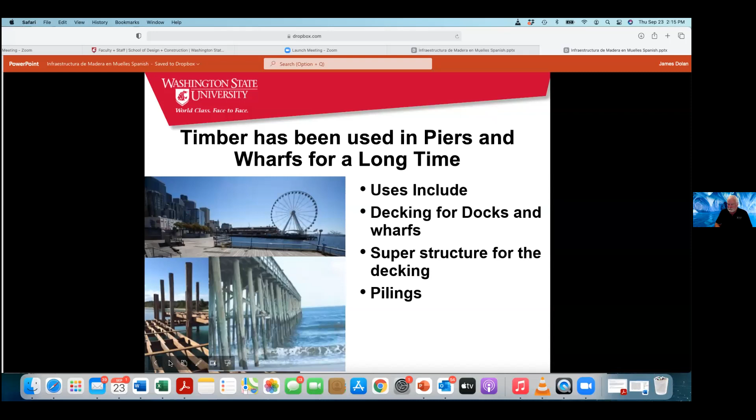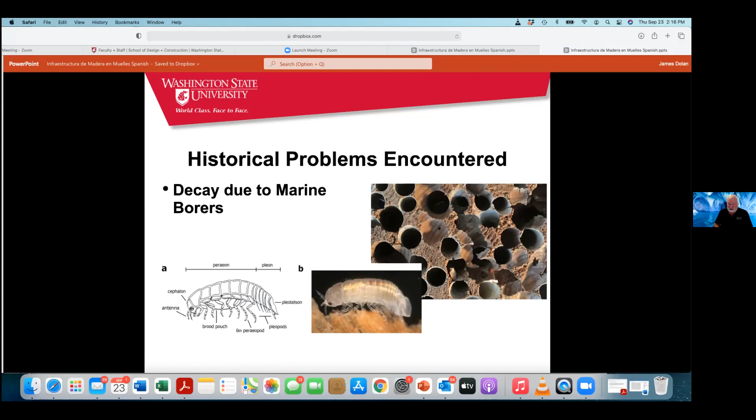There are some historical problems with using timber in marine environments, including decay due to marine borers. This is one of the animals responsible, and it ends up making the piling nothing but a sponge with a bunch of holes in it, like honeycomb. Fungi and other organisms also attack it.

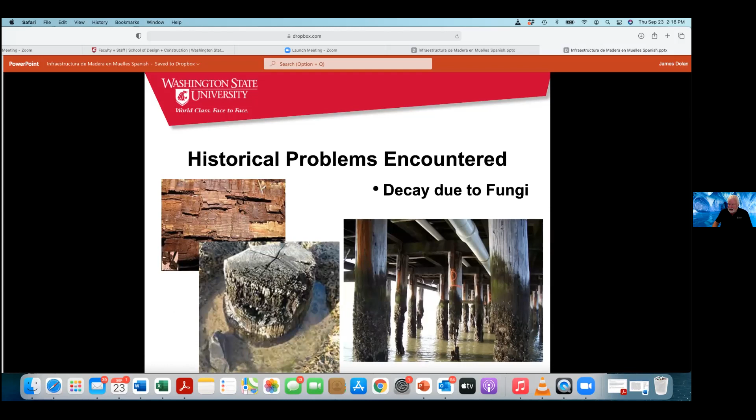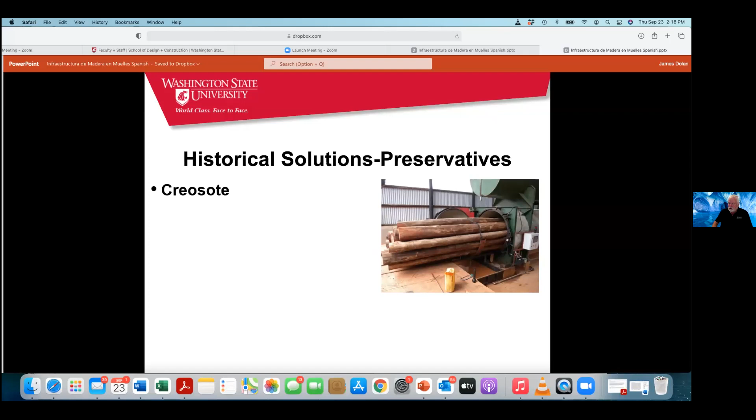These are historical problems, so people have worked on ways to combat that decay, and there are historical solutions. The first one was creosote, where you preservative treat the wood, and then pentachlorophenol. I've worked and designed a couple of bridges using pentachlorophenol, but in the United States it's now restricted to non-contact applications because of carcinogenic worries.

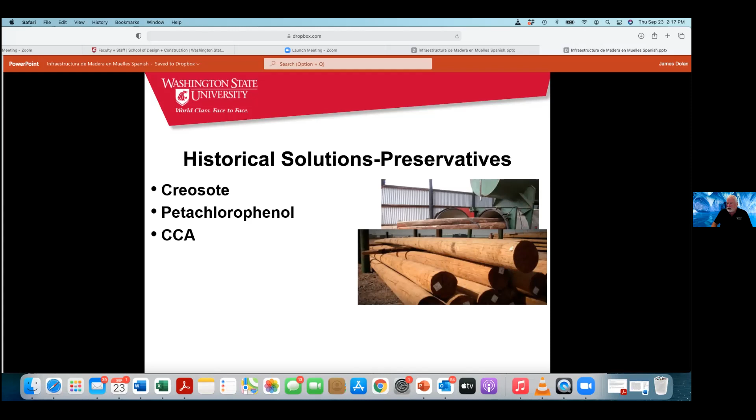CCA, chromated copper arsenate, is another one, typically the green colored timbers that you see in things. All of these end up with heavy metals that are now very much considered a pollutant for the surrounding water.

About 15 years ago, the Office of Naval Research awarded a project to our laboratory to try and develop new composites to get rid of the heavy metal issue, improve longevity of piers and wharves, and try to improve things overall.

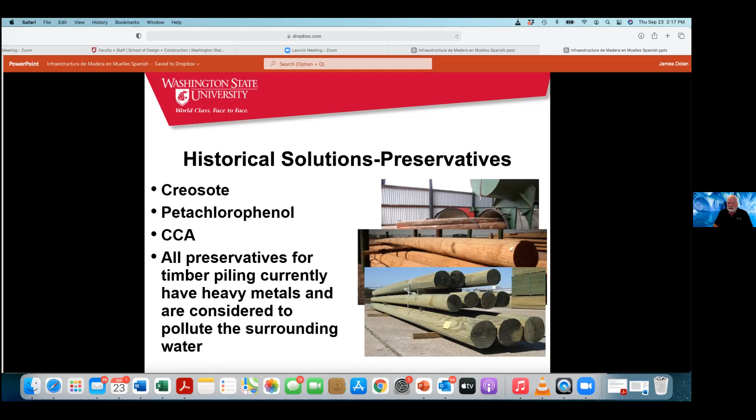Timber is still used in piers and wharves, primarily due to cost. It's fairly easy to construct, contractors are familiar with the material and can construct it with minimal training of personnel, and it's relatively easy to repair—you remove pieces and replace them if necessary.

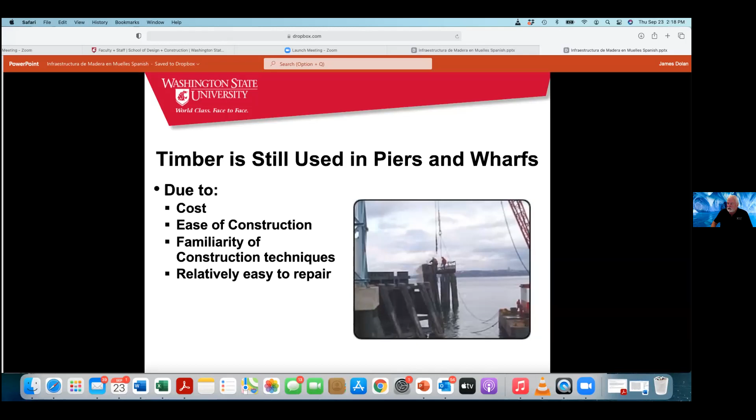We've also come up with jacketing options to jacket and grout inject, or use fiber wraps, because pulling pilings is more difficult due to the cost of removing the superstructure first. There are carbon wraps from a number of companies, steel jackets that are grout injected, plastic tubes that are grout injected—a lot of those types of repairs out there.

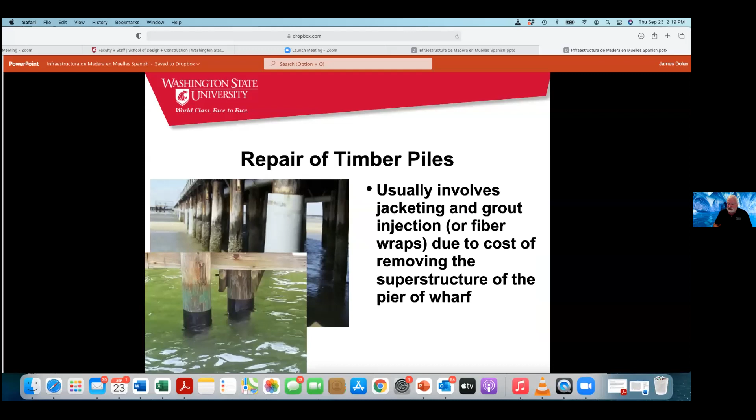They extend the life, but they don't make it completely last indefinitely.

We've also used a lot of timber in retaining walls and bulkheads around marine areas. Things like this are very common along shorelines, to protect against erosion and wave action, and to provide walkways and places where boats and ships can dock. This typically entails pilings backed by a timber wall with walers holding them in place, or a combination of steel sheet pile and timber—there are many different combinations.

Until recently, most of this was preservative treated. The problem with a lot of preservative treatment is penetration—depending on the species, it's very difficult to actually get the chemicals into the wood. Sapwood is always easy, but when you get to the inner part of the tree, the older material, it's very difficult in most species to effectively get the chemicals into the timber.

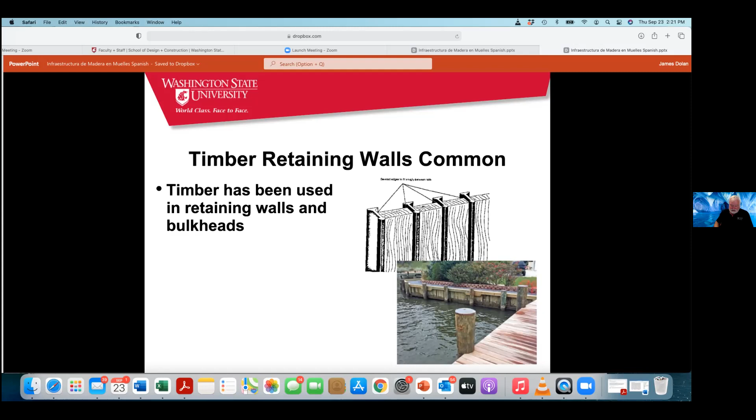So you end up having a shell on the outside a few millimeters thick, with an untreated core that ends up having the same problems as if the whole thing were untreated. This shows a combination of timber piles and walers with sheet metal or sheet pile backing, coming into an industrial area along a wharf.

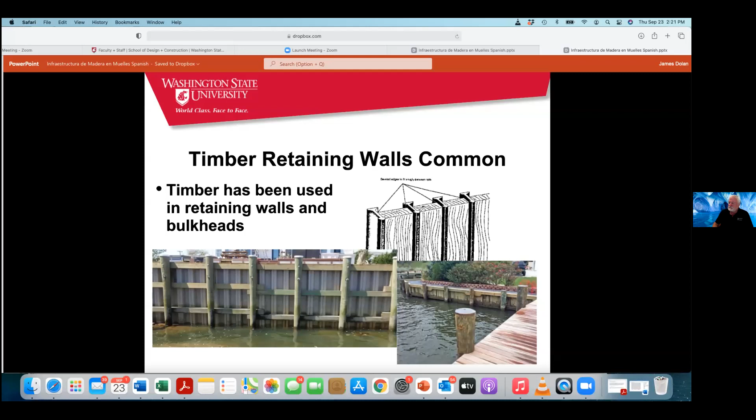In our research facility, we developed a wood plastic composite, looking at getting it strong and stiff in the longitudinal direction, similar to how timber behaves parallel to grain versus perpendicular to grain. That comes through in a special patented die that a couple of companies use—it's a wood plastic composite that uses recycled plastic.

It depends on the financial cost of the recycled feedstock stream—it always comes down to money, whether you use new or virgin materials, unless there are tax incentives. This is a fairly heavy composite that's then encased on the outside with another plastic material. In this case it's shown with PVC, but there are other materials we can co-extrude to have a cap on the outside, and this has turned out very successful.

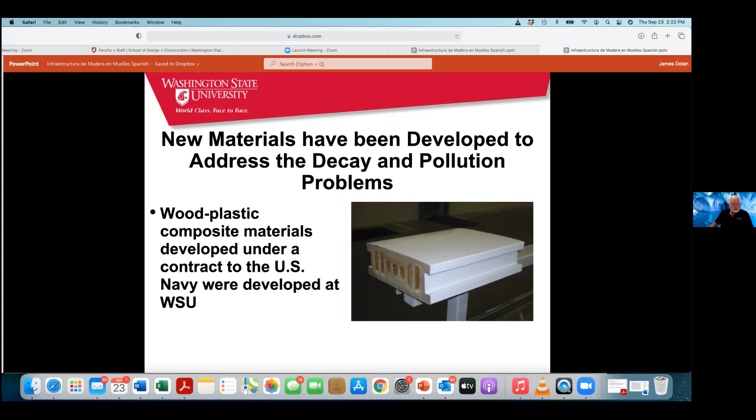The Navy put us under some pretty high pressure requirements. First, it had to be designed for a minimum of a 3-meter span. This is a continuous extruded piece, so the length is whatever you want it to be. But it has to sustain a concentrated load at the center of the span of about 8.6 metric tons, distributed over an area of about 10 centimeters.

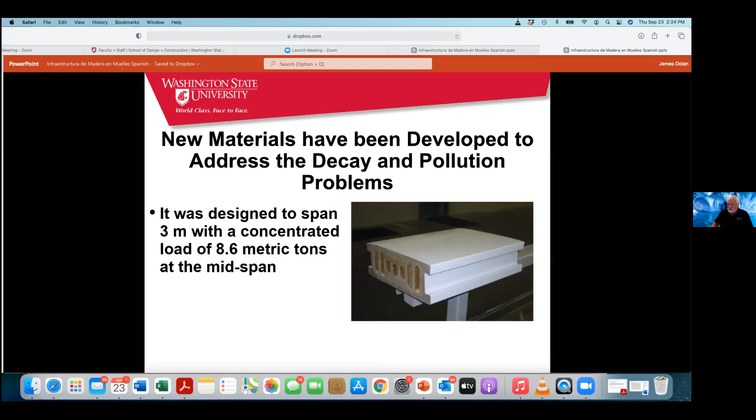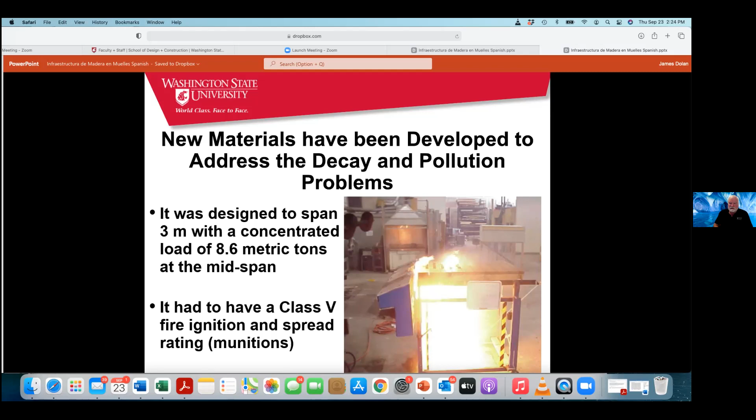That's because of the munitions that the Navy puts out on docks, and the equipment for moving material around, fork trucks and things like that, and the loads they have to sustain, making it so you don't have a continuous wall, you get by with using pilings. And if you have munitions out on a dock, you really don't want fire spread or additional fuels coming from the product it's sitting on. So we had to have a class 5 fire ignition and spread rating. A lot of tests had to be done around formulations, especially of the cap layer of this material, to meet the fire requirements of the Navy.

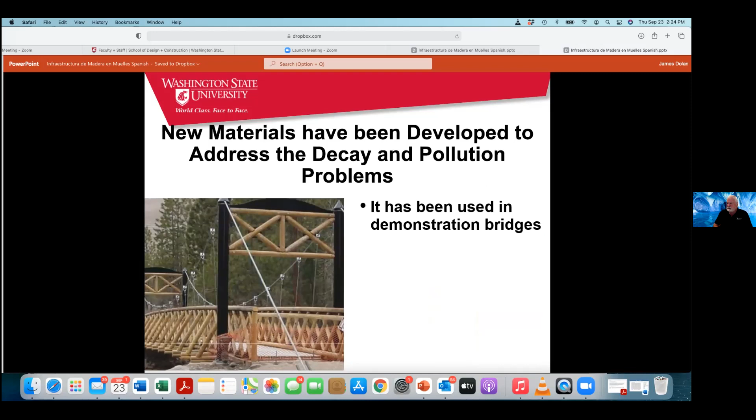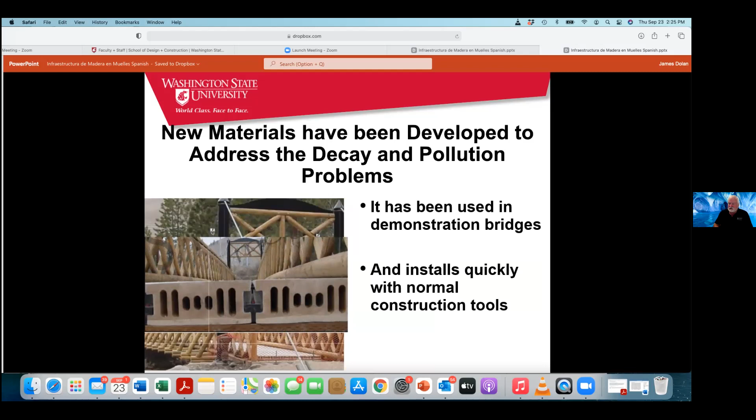We did a couple of demonstration projects with this product for the decking on this bridge over in Montana. It's been used in a couple of different places. It installs quickly with normal construction tools, using clips to hold it in place. Nothing really difficult about assembly.

And it's now being used for Navy piers. The Annapolis Academy Pier is all being built out of this. Parts of the ferry dock in the Puget Sound are being built with this material because it removes all the heavy metals and provides for longevity, since very few animals, whether insects, borers, or anything else, will consume it. So the longevity should be pretty good.

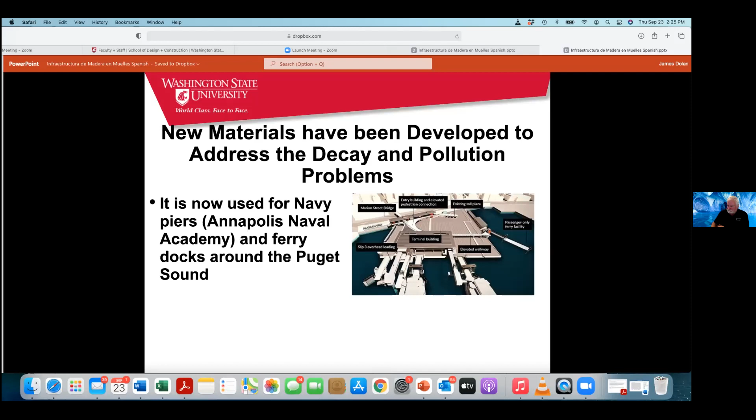This is another one of the docks in the Seattle area where this product is starting to be implemented. These are some of the first places they've been put in - the pilings and walers where the ferry comes in to push up against, the pressure walls and rub panels that the ferry pushes against. It has fairly good wear ability, and it's using the waste products from the wood manufacturer for lumber and other forest products.

It was originally designed to be manufactured with recycled plastics, but virgin plastics work as well. That's why they came through our lab to try it, and it was developed. We developed it over a period of about 8 years with the Department of the Navy to come up with it.

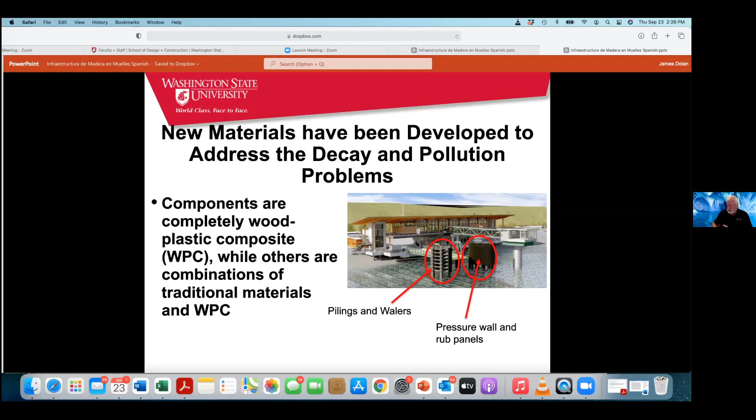I would like to now transition into other applications where timber has been used and is continually used in transportation areas. Wood has been used in transportation infrastructure since before the settling of the Americas.

Covered bridges like the Town Lattice Truss bridge you see here, or an arch bridge in the red one, were done. The Department of Transportation for Vermont had us do tension testing on removed segments of bridges over 110 years old, because they had to load rate their bridges. They gave us a sampling that we did tension tests on, and we actually broke our testing machine on the first one because we underestimated what we thought the strength actually would be.

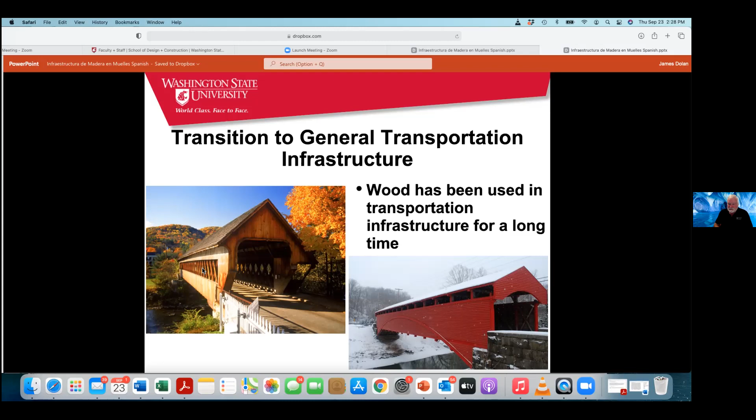Modern bridges - this is the entrance to Mount Rushmore. It's a glulam arch bridge with a timber deck on it. It's been there since I was a kid, and as long as you maintain these structures, they'll last a long time.

Any structure, I don't care if it's concrete, steel, timber, or whatever, if you don't maintain them, they're not going to last. You have to maintain the roadways, maintain and inspect the bridge, look for corrosion in the connections and decay of materials - that's part of having any structure. You can look at the recent collapse of a building in Florida that everybody is aware of - that comes from maintenance problems more than anything, not being willing to pay the money to keep the system functioning and maintained. Politicians don't get reelected by maintaining things.

They get reelected by putting new things out there, and we as the public pay the price. We need to start turning around - anybody who owns a house knows you have to take care of and maintain it, empty the gutters and everything else. It's the same with any structure. You can make timber last a long time if, one, you control the water, and two, you maintain it over time.

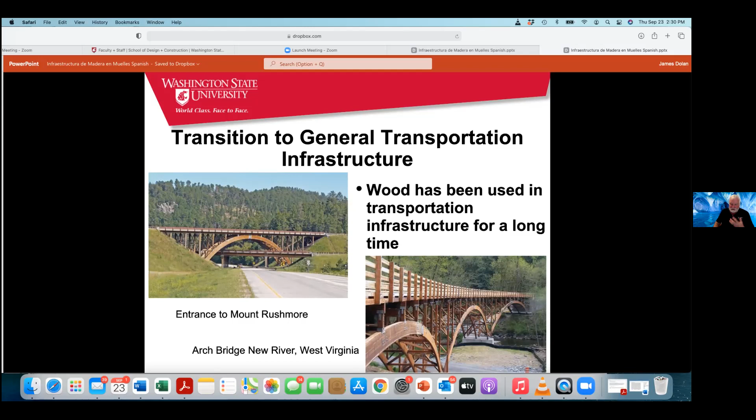This is another one, a bridge I really like in West Virginia, in the New River Valley area. It's a beautiful arch bridge that I used to visit with the Boy Scouts; we often went around there when I lived in Virginia. They're beautiful bridges, and the material is warm to the feel as you look at timber.

Timber continues to be used for vehicular bridges for several reasons. I have a former student who works for the Federal Highways in Vancouver, Washington. She graduated about 5 years ago and has been on the design team for at least 6 timber bridges during that time.

Some of the reasons timber is used include cost and accelerated construction. You can panelize it and construct much of it off to the side, so you don't have to shut down as much. There's also possible use of the original foundation and superstructure, and ease of repair.

While I was living in Chile the first time in 2008, working with Mario Giuliano and Peter Deckent, we designed a couple of bridge decks that allowed the Department of Transportation, Ministry of Transportation there, to replace the decks on some secondary highways. It had to be imported because of the size of timber we were using, 2x12 nominal, which is larger than what's typically manufactured in Chile right now. But they didn't have to rework the foundations.

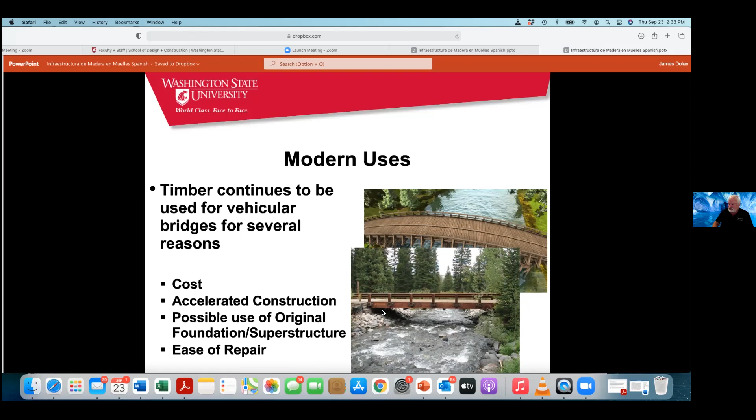This is a glulam deck going in on top of steel girders with clips. You put it in panel by panel, and it goes in rather quickly—you could lay out the deck and probably replace most of one deck in about 2 days worth of work.

You'd be able to put up the railings on the side if they were pre-assembled and ready to assemble—probably in a day—and you'd be done with that deck of the bridge, except for the wear surface, usually asphalt, put over the top.

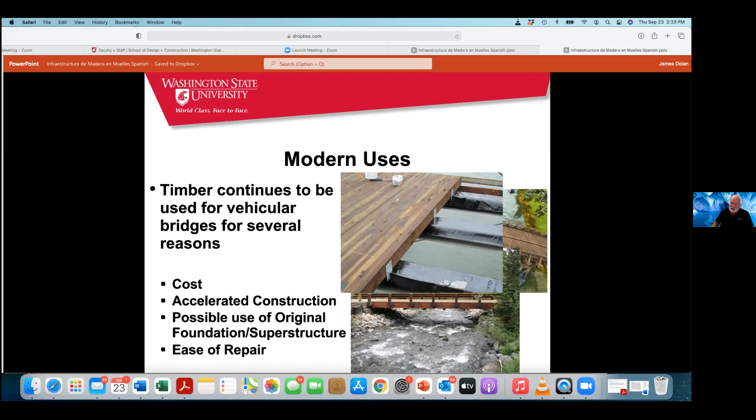So they can also look at them this way. This is a bridge that's been put up in the eastern United States, set up because they could do accelerated construction and build the bridge off to the side, then lift it in with a crane and place it.

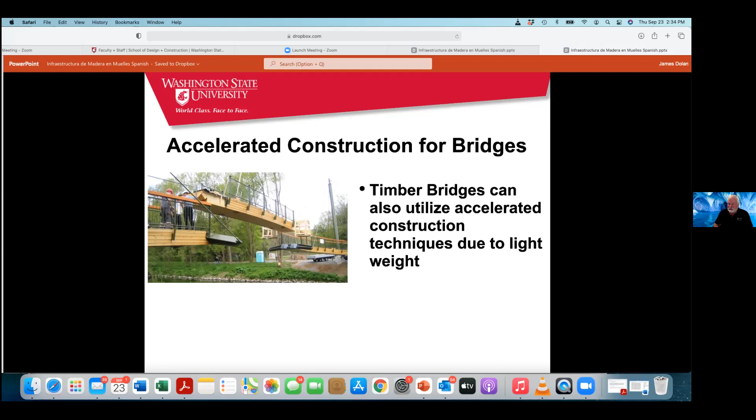Most of it could be constructed off-site, which is a major trend in construction in North America—off-site construction to accelerate the rate of construction, reduce construction financing, and reduce interference with roadways in terms of transportation structures.

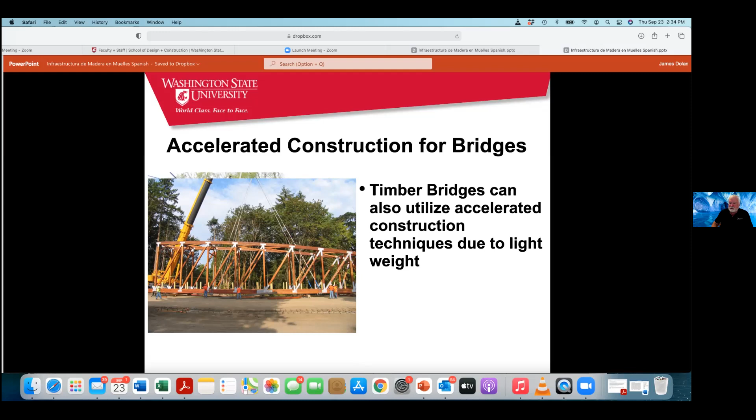Another glulam truss bridge is being assembled off-site, but it can be lifted in as an entire segment, put into place, and changed around quickly—you don't have to shut down road traffic as long.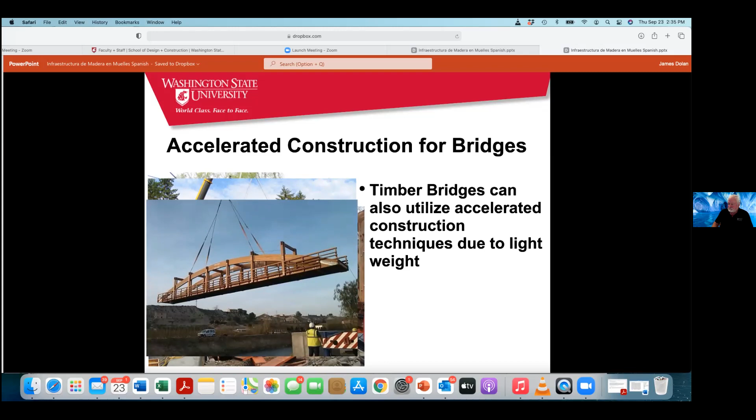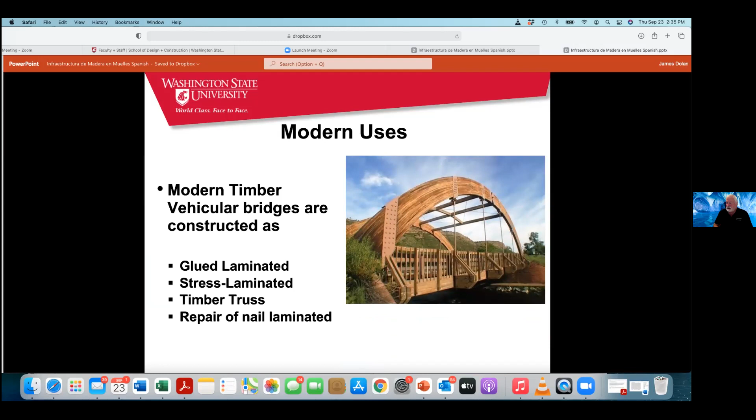So we end up having a number of different systems. Glulam, I think, is still one of the most used. Stress laminated bridges are another type we put in in Chile that we designed there—yes, it needs to be tensioned every 5 to 6 years with a hydraulic system to bring the compression back up on the deck, but they're very effective.

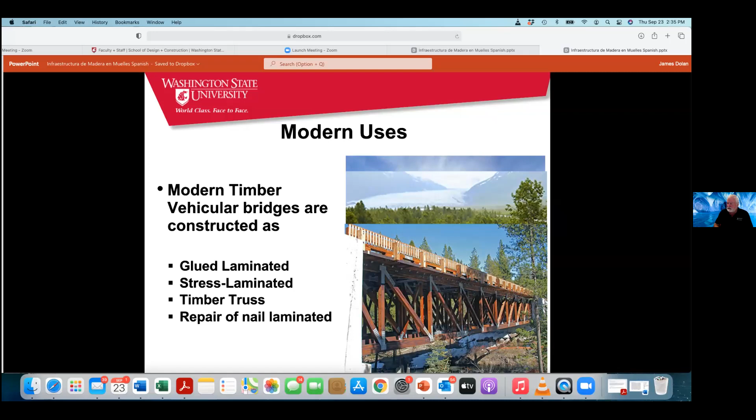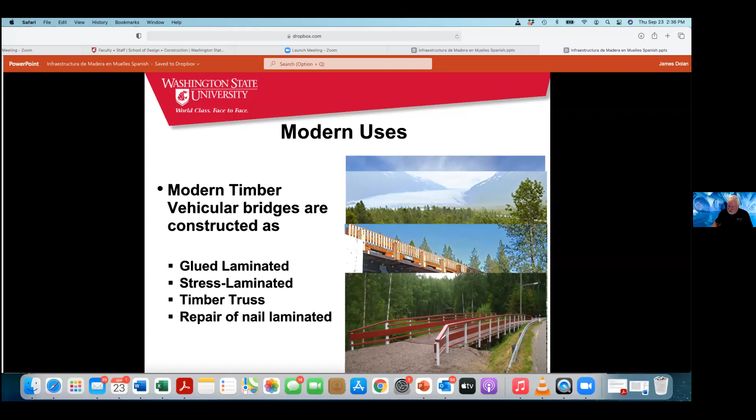Trusses are common for longer spans because they're lightweight and can be assembled off-site and put into place easily. You can also put in a repair using nail-laminated type decks—they're a little more difficult to design and not as efficient, but there are different ways you can do things.

One of the large uses of timber in bridges is replacement of bridge decks for minimum closure time. In Montana, the DOT has been doing this for a while. Federal Highways says they continue this on some of their less traveled bridges, just so they don't have to redo foundations and deal with long detours—they don't want to shut down traffic for a long period. With concrete, you end up having to wait for it to cure, so it becomes more of a problem.

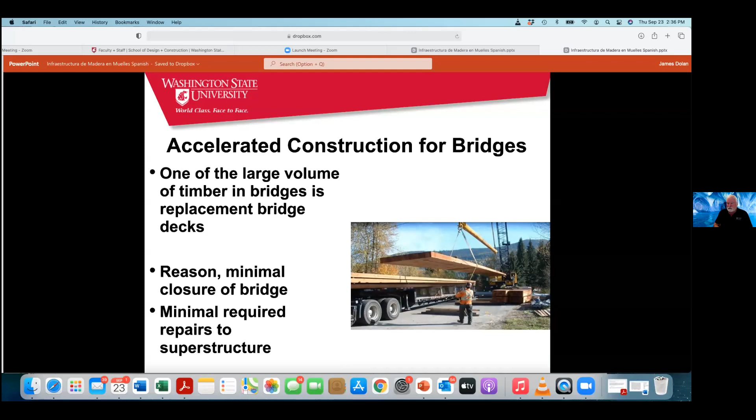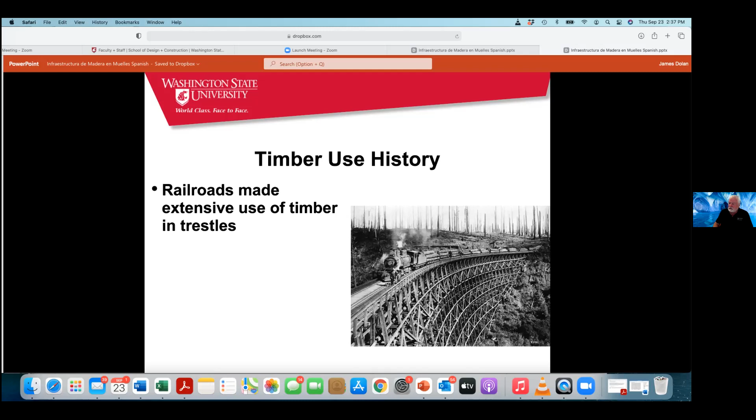The railways really made use of timber, and there's still a lot of timber trestles under active rail lines in this country. This is one of the bigger rail lines from back in the steam engine times, still running between here and Spokane. That rail line still has at least five wooden trestles that I'm aware of. They're still quite frequently maintained within the rail system. This is a really large one.

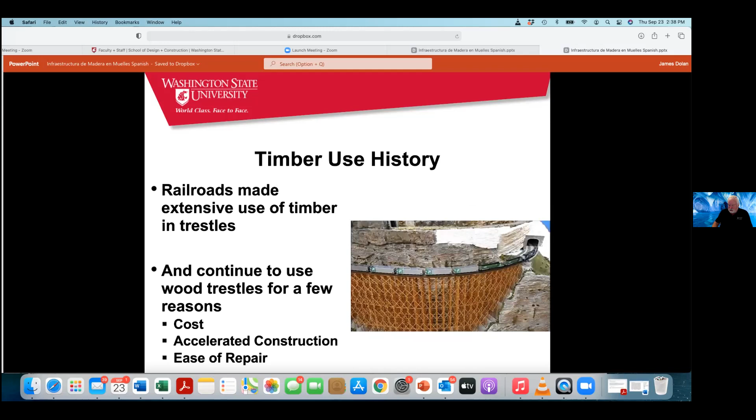This one was built by BNSF Railroad for a mine. But it's accelerated construction—they come back and inspect it and repair individual members without having to replace the entire trestle.

We also use a lot of timber in non-structural, or minimal structural, applications. Most guardrail posts are wood due to lower cost and ease of construction, but more than that, collision tests have shown that those wooden blocks increase energy dissipation and make the guardrail system safer for the occupants of cars involved in accidents.

In some of them, we end up drilling holes through at a certain point to make them reach a maximum capacity that reduces the deceleration of the vehicle and improves the safety of the occupants of the car involved in the accident. There are a couple of studies out there that show the energy dissipation of wood when it fractures like that is beneficial for safety.

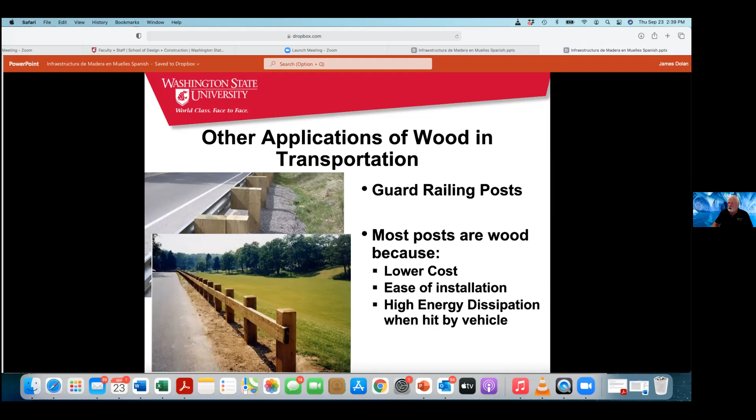Retaining walls are very common, used all over the United States, especially when they want to incorporate vegetation as well—they'll plant vegetation in between these sometimes. It's ease of use, ease of installation, ease of construction, with no special training or skills needed to use it. And yes, we use preservative treatment in all of those.

I've been involved in two structures that used naturally decay-resistant species. When you do that, you have to make sure you're using the heartwood and not the sapwood to get that decay resistance, but you're also going to pay quite a bit higher price, because those species are typically hardwoods. Sitka and Alaska yellow cedar are also not too bad, but they tend to be species that aren't the typical lumber type you're using, so they're more expensive.

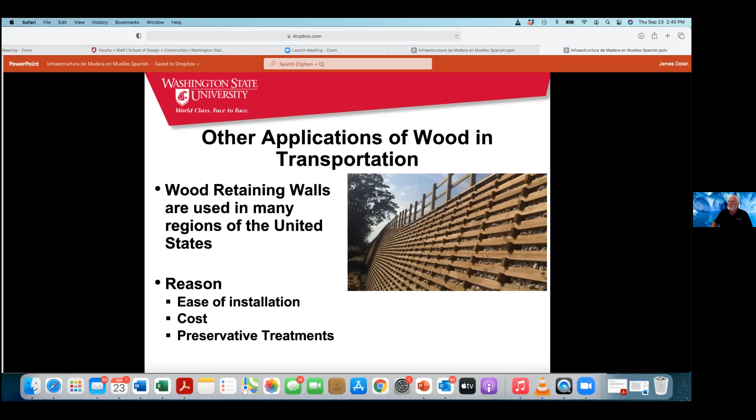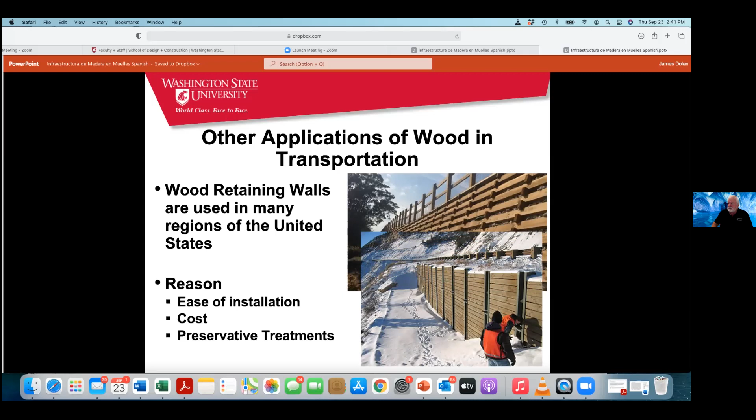But they combine those between steel piles and wood as well—fairly frequently used. Of course, railroads have used these for a long time. There's a difference between a concrete tie and a wooden tie; both are still used fairly often in the United States. There's an awful lot of wooden ties being used, whereas in Europe, concrete ties are pretty much the standard.

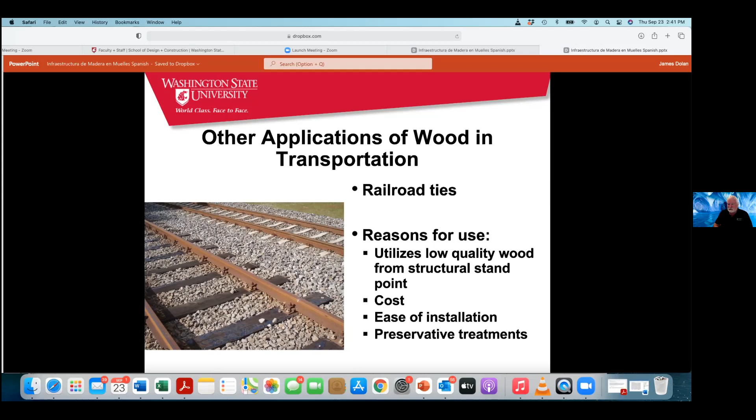Sound barriers—around our highway systems, we often erect walls on the side to stop the sound of traffic from disturbing residential areas, and that's very frequently the use of timber, preservative-treated timber, with CCA and other quats and things like that.

People sometimes worry about leaching. It's not as bad of a problem, especially if they were to re-dry it, but I don't know of anybody except one company that re-dries preservative-treated lumber. The chemicals actually chemically bond with some of the cellulose inside the timber, so they're not as big of a leach problem. If you use borates and some of the salts, they will leach out, but those are also the same things used elsewhere—borates are used in eyewash.

There's a sound barrier for airport, and they can have designs to them.

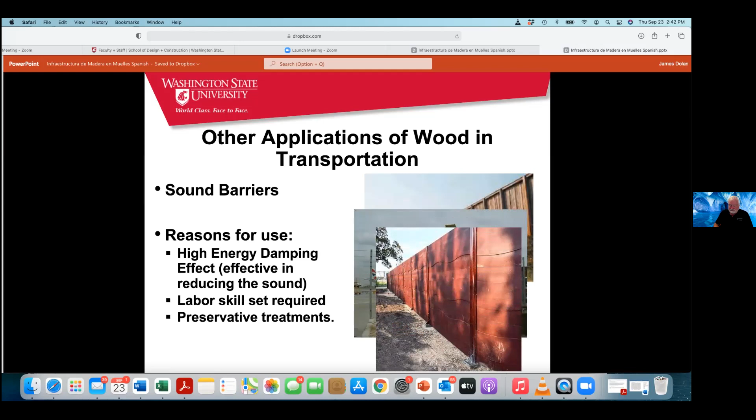So what would be required to use more wood in transportation in Chile? First, you would need to write or update a design standard to include timber options in your transportation standards. You would have to allow imported material for larger cross sections than are usually produced in Chilean sawmills, and develop a design methodology for bridge replacement wood decks on secondary highways.

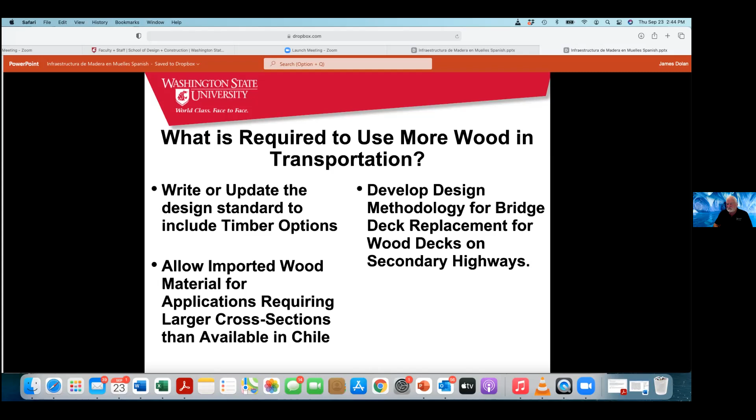This was started back in 2008 when I was there the first time, living for a while when I was on a Fulbright fellowship. But I don't know that it was ever completed. No one has really told me that. If it was, we have a bridge design manual for this country that the Forest Products Lab put together. There was an effort to try and update it, but the main protagonist of that has retired. I think it would be a good thing to update it again by someone with newer blood than the rest of us old people like me. I only have another 8 months and I'm retiring.

Work with the bridge contractor to determine what training, if any, might help them be more productive and profitable by working with timber. And develop some guidelines for designers and contractors to better understand the difference between working with steel, concrete, and timber. There are differences, there are similarities. Each material has its proper location, and each material for each project can be the ideal one if they are designed properly. You cannot design a timber bridge as if it were a steel bridge or a concrete bridge and expect it to last. You need to control water. Your stiffness is different, and those kinds of things need to be considered as you do that.

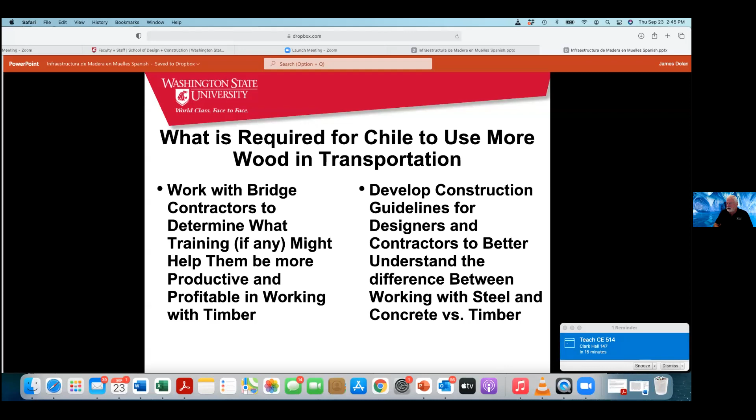Students get a break today.

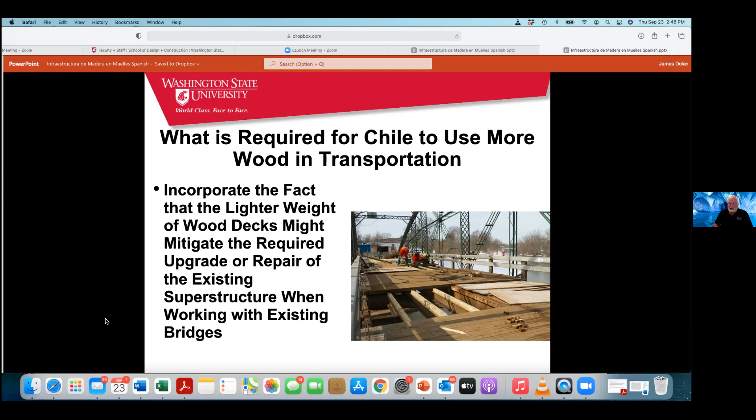Incorporate the fact that the lighter weight of wood decks might mitigate the required upgrade or repair of the existing superstructure when working with existing bridges. You could potentially use the superstructure there and only replace the deck, and possibly walkways if there are pedestrian walkways on it. You could potentially simply repaint the steel deck or steel superstructure and put a wood deck down. But you might at least avoid having to get in and redo foundations, which is really expensive when you get into bridges. Redoing abutments and piers out in the middle of the river is expensive. So I just look at timber bridges as being one of the potential solutions to extend the government's budget for repair of roadways, and I think it could be a very effective one while utilizing materials that are local.

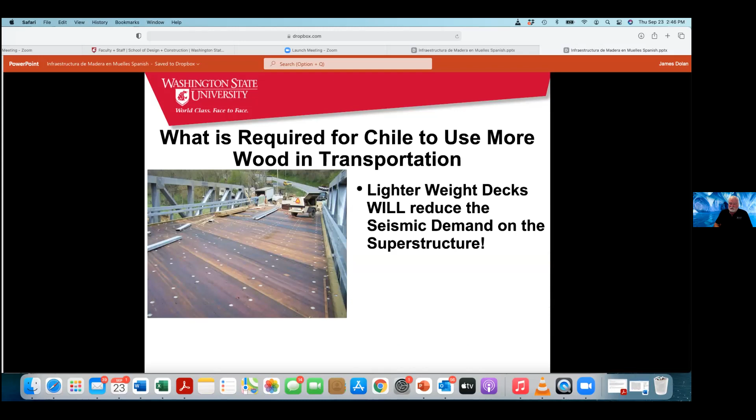The lighter weight of the decks will also reduce the seismic demand on the superstructure. And you can panelize it and put it in panels. If you go to either stress lam or glue lam decks, you can panelize them off-site and lift them into place, accelerating the construction process. If you have a bad foundation, you have a bad foundation - there's not much you can do about it, but you might avoid tearing the whole pier out and be able to just deal with the timber, repair the top cap, and put a lighter weight bridge on top, making it last another 40, 50 years.

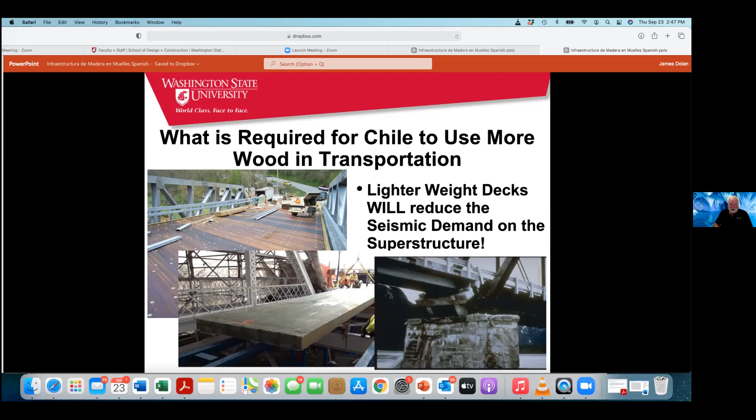Develop design and construction guidelines for paving over wood decks. You need to control the water. When I was at Virginia Tech, we had a project through AASHTO, Federal Highways, and the Forest Products Lab looking at the different layers you could put between an asphalt wearing surface and a timber deck. We put a report together to recommend what methodology to use, whether it was a stress lam deck versus a glue lam panel deck. The adherent polymer layer that you roll out over the top of the deck before putting the asphalt down made a difference of up to 5 years of wear life on that new wearing surface, simply by what you put in between the timber deck and the asphalt on top.

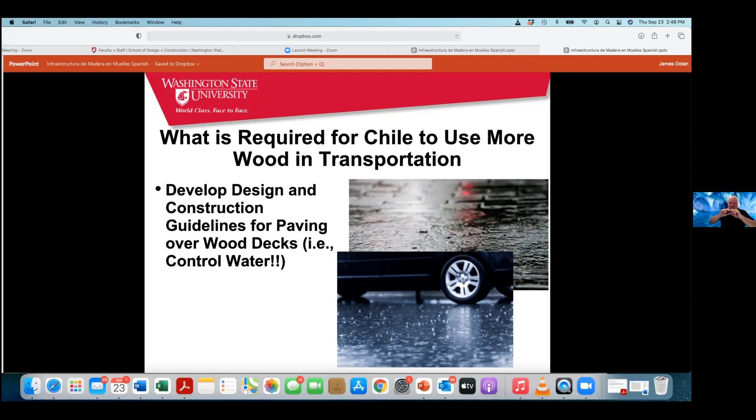Not all countries have timber manufactured in the species needed, i.e. the density or sizes required. Yes, that's true. However, the world market is removing that barrier. Chile exports a lot of product to the United States. Sometimes the United States should possibly export back. I know that some of the buildings built in the North mining regions had imported southern pine and or Douglas fir material to build those 6-story structures. From here, trade goes both ways.

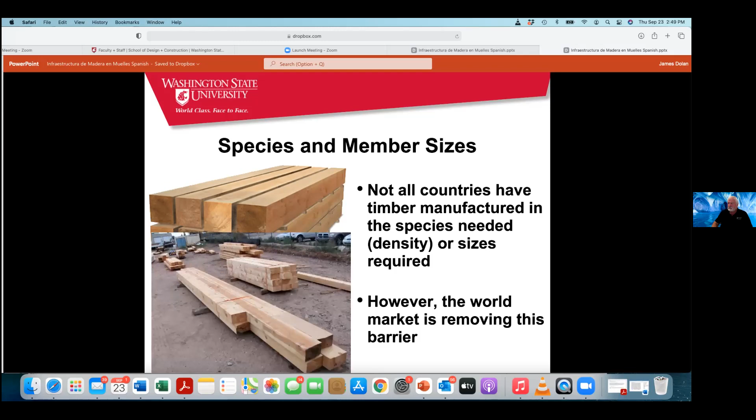So this is a thing that I always end up preaching about when I'm talking in Chile: single entities can't move significant change. You need to collaborate, you need to work with others, and build an effort from multiple aspects in order to make really significant change. So build coalitions with people - designers, other researchers, whoever it is around the country - to build a groundswell of support to make change like this.

It takes a group to get over big problems and make significant change. That's what I want to say. And I'm going to close with this.

We're about to start this project I'm currently working on. I told my team that I would at least put one slide in for this. Next month, we start construction on a 10-story full-scale building to be tested on the earthquake table in San Diego. We will be doing the tests on that probably starting in March.

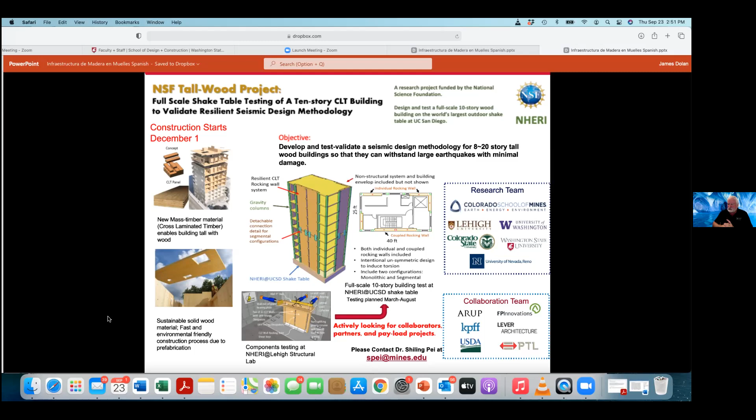With that, I can try and answer any questions that you have.

Okay, thank you, Dan. Fantastic presentation. It's really, really nice to see this overview of the different structures that compose the infrastructure. So it's really, really nice to see the different options that we have here in Chile and Latin America to incorporate wood and timber in the structures. So not only think about buildings, also apply in the roads.

Yeah, you talk about, for example, the lightweight, and I think that is one of the advantages of the use of timber in the different structures, especially in our countries, that we have the problem of earthquakes and the problem of mass that you have to reduce for any kind of efforts. That's very true. It's important.